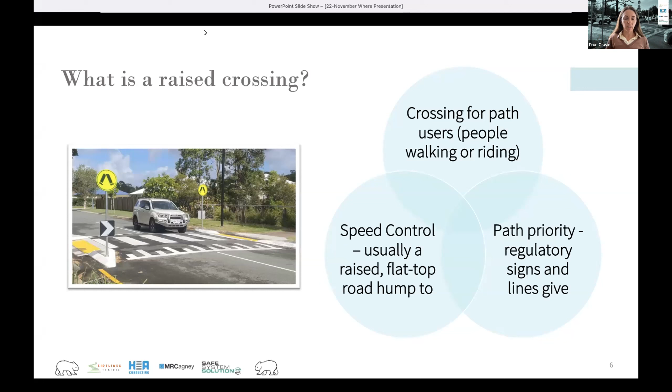There's three key attributes of what makes a raised crossing. The first is that it's a crossing for path users, so it's a crossing point that needs to have paths connecting to it. The second attribute is it needs to have some kind of speed control - that's our safe system that opens up opportunities for people to see each other, reduce vehicle speeds, and provide that safety benefit. And the third is it needs to have path priority, so path users have priority over vehicles.

So it's that kind of ambiguity. In the next section we'll be looking at, you'll be learning a lot about stay safe, obvious, and step free. It kind of fails that obvious test when we have to be questioning who goes first. So that's what isn't a raised crossing.

We'll have a few little action times in this presentation, just to get us going and moving, applying some of that in practice. This is our wombat's thumbs up, thumbs down - we've got this very judgmental wombat who will be judging us. So I want to use the chat quickly, and for each of these examples you're going to let me know whether it's a raised crossing or whether it isn't. This is our first example, in Maroochydore.

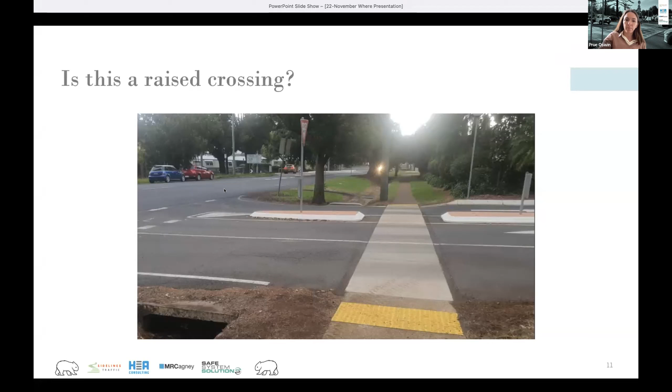What about this one? I think our group is quite unanimous - no. This is a very interesting one actually - this is the driveway access to a school. There's some treatments that would suggest path users have priority, but there's nothing to drivers to suggest that path users have priority. Legally, the path users would have priority in this situation because it's technically a driveway, but there's nothing there to indicate that to drivers. So it's an ambiguous situation, judgmental wombat.

This one - let's see, oh this is more divisive. Yeah, we're giving 40/60, 50/50, yes/no. This one is more divisive, and I guess in terms of that, it's not as obvious as the other ones. So what we could do, I think we need to think about how we could make it more obvious.

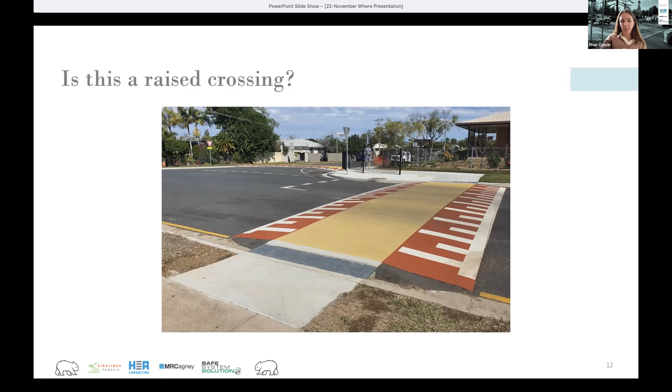This is a shared path priority crossing in Queensland. It's not great from the view we've taken it, but what you can see in the background is there's a give way line and give way signs on the approaches. Right in the background you can see there's a little underplate for the give way signs that has the ped and cycle symbol. Some other things we could potentially do to make it more obvious, because it's a shared path, is put a center dashed line down the middle to show we've got path users coming in 2 directions - mimicking the bikeway standards for crossings, which might help with that obviousness. But that one is one we would call a raised crossing.

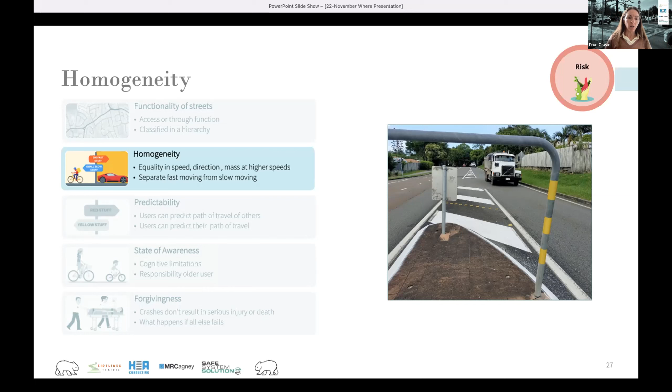This is a contrasting example where at that crossing point, at the place where the vulnerable road users are coming in contact with the big fast stuff, we're slowing the big fast stuff down to create those homogeneous speeds.

It's going to be very difficult for them to predict which of those cars, if any, are going to be turning. So basically the assumption here, since there hasn't been any slowing down, is that all the cars are going fast. Predictability is about being able to predict your own path of travel and the path of travel of other users. And when things become unpredictable, it becomes very difficult to predict when crashes might occur.

The examples we have at roundabouts are a really good example of predictability, because the same issue happens where it can become incredibly difficult for people to predict which vehicles are actually turning off the roundabout. And at that side road we were looking at before, it's difficult to see which vehicles are coming through and which ones are leaving.

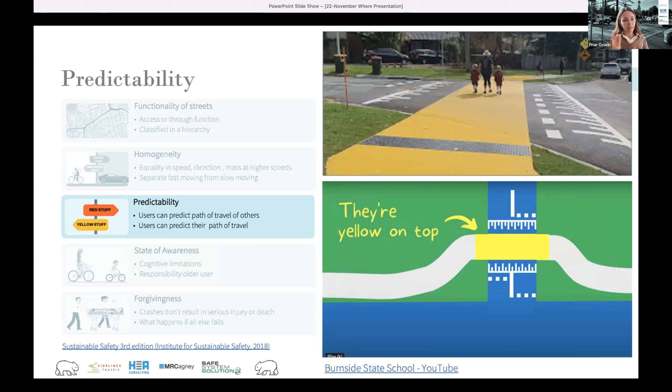One of the things with the yellow crossings too, these are being installed around schools. So the example below, there's some little extracts from a video that was developed as part of the project to roll out and to distribute between the parents and citizens clubs to the students and parents and things. But one of the reasons we made it yellow on top, we wanted to make it predictable. It's similar enough to a path that it looks like a continuous path of travel, but it's also a distinguishable color, so you can still train children. You know, you still need to check for vehicles. That's what it's doing. It's asking them to check, but the drivers have to give way.

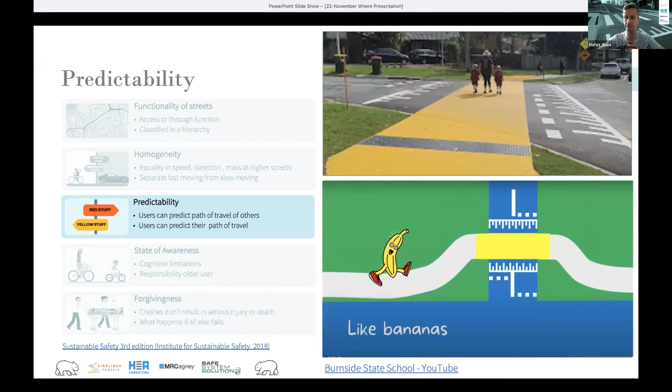So does the color yellow signify anything else, or is it just because of its visibility and prominence? It's used as a warning color. It's signified in the MUTCD. So it's used typically as a warning color. So it doesn't have an actual "you must do this," but it raises an awareness. So it's chosen because it's kind of consistent with the message of warning.

We also need a color that contrasts really well to the ramps to make the pathway look apparent. It also needs to look like the pathway is continuous to make that obviousness. And also a color that's just describable. To me, that's the final piece of the puzzle, so that we can pass the story on if anybody is confused and say, hey, where it's yellow, you need to check.

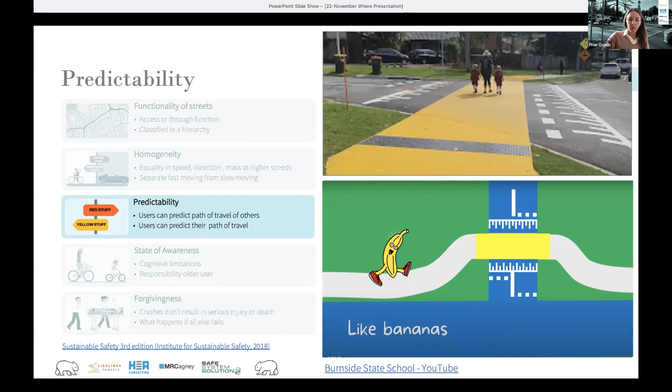So we have got a question here. Simon asks, does yellow signify shared path? No, it doesn't signify shared path. No. Thanks, Brett.

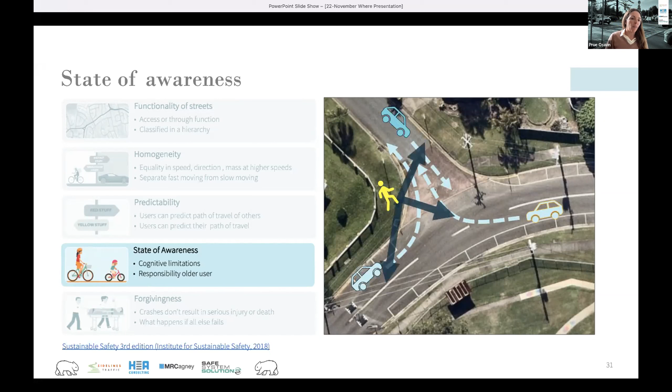I've got an example of this now. This is my son, and so we've practiced this crossing lots of times. We've talked about the 3 different streams of traffic he has to think about. It's pretty tricky for him to see around that parked car, but he's waited till the crossing supervisors come out. Now, oops. The camera work in that video is not great.

And that's because what actually happened is he checked the first stream of traffic, this first blue arrow. He then checked the second stream of traffic. Sorry, I don't know why that's going again. But he forgot the third one, which is an easy one. So it's this third one that we often forget. You know, it's difficult to get. And that's when I've kind of stepped out and made myself obvious. So it's those 3 different directions of traffic.

And I like this quote from Mark McDonald, a technician I work with at TMR. There's a reason we don't let children drive motor cars, and making them make these complex decisions and think about lots of different traffic streams is not the right way to be designing for a state of awareness. So it's really about these cognitive limitations, and also putting responsibility on the older and licensed road user. Those people have demonstrated a certain level of competence. And so this is an example of the treated crossings after they've been installed to address those issues.

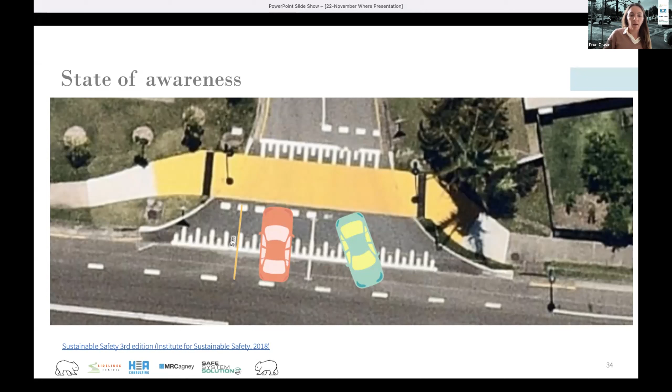Session 3, we'll hear from our world expert in mind wandering during everyday driving. So we'll hear more about that, kind of how raised crossings can be useful in that situation.

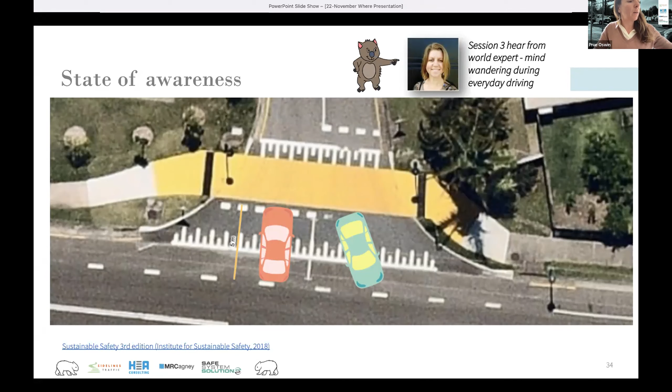Oh my God. Right, so we're still going with state of awareness. This is a pretty big one, and I like to think of this as my most complicated slide. So hang in there with this one. But some really interesting studies have been done on what's called visual looming and how we perceive vehicles coming when they're traveling at higher speeds. So I'm going to talk you through this graph. If you've got any questions, let me know.

But basically, what they did was, sorry, I'll just take a step back. So they took children out to a site, and they timed how long it took them to cross the road. And then they stood next to them, and as a car approached, they asked them, would they be comfortable to cross? And they had to keep saying yes until the car was close enough that they decided no, they wouldn't cross because it was too risky. They didn't have enough space.

And what was really interesting was that as the vehicle speeds got higher, so they went from below 50 kilometers an hour up to over 60 kilometers an hour, the buffer time between how long it actually took them to cross and how much time they allowed shrunk. So below 50 kilometers an hour, the safe time is here. They had about a 3-second buffer, which I think is a pretty good safety buffer. If it's going to take you 5 seconds to cross, having an extra 3 seconds up your sleeve is probably pretty good. But when you got over 60 kilometers an hour, it was down to less than 1 second. So even though the risk had got higher, their buffer had got less.

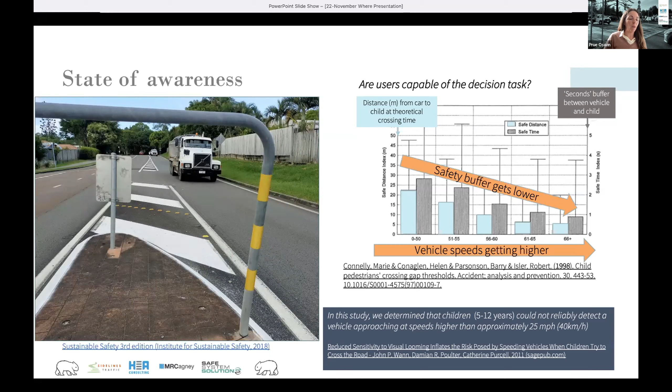So we really need to think of this as part of the state of awareness. It's the cognitive kind of limitations of the users we're providing for and what we need to think about on the path network. We also need to be thinking about someone with a vision impairment or a mobility impairment that's going to take them longer as well. I found that really interesting, that one.

So this is what we call our critical impact speed. So 20 kilometres an hour for death or serious injury, or 30 kilometres an hour to prevent a death. So what we want to make sure is that if a person is hit by a vehicle, it happens below this critical impact speed, and 30 kilometres an hour is generally accepted as our safe system critical impact speed for a pedestrian being hit.

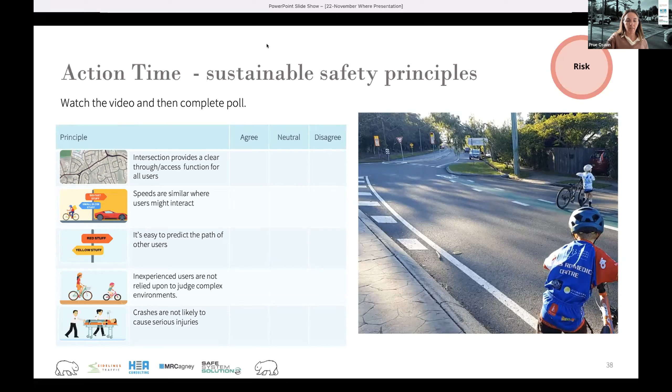And we've got one more example now. So we're going to go into, well, is this poll 2? Nope, we haven't polled that. Hang on. Right. So we've got another example here. Again, it's a roundabout. So we'll do the same thing. Interestingly, this has similar traffic volumes as the other roundabout.

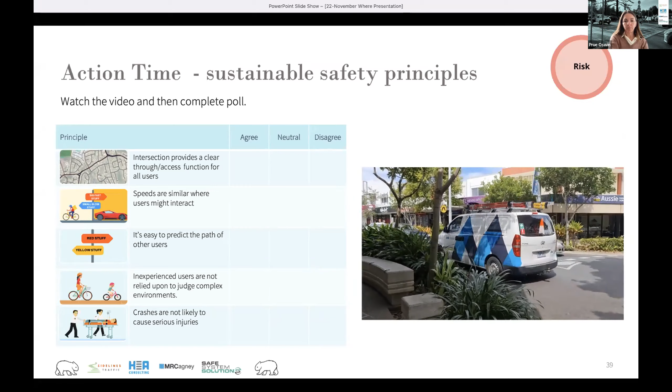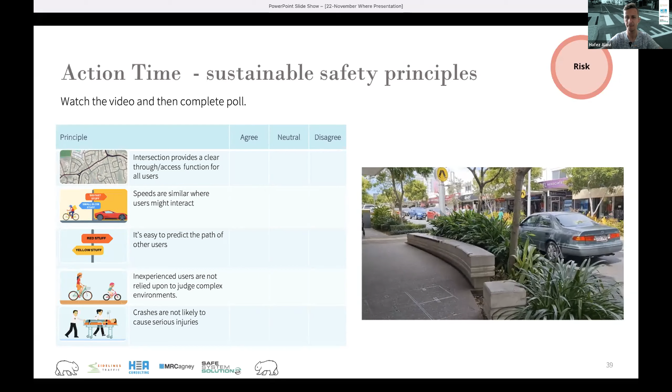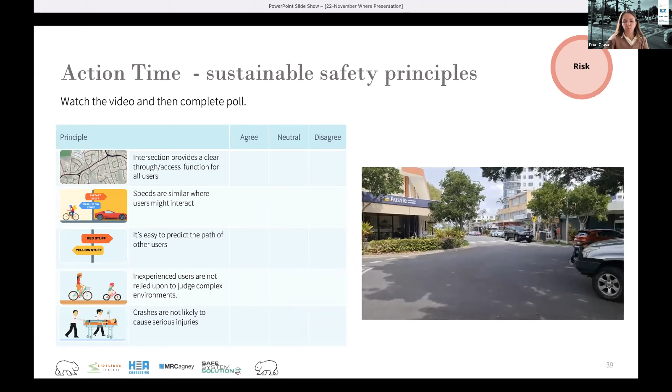I'm also interested how my brain uses comparison to judge the situation. So in a sense, it's sort of a bias. I'm biased by your first video to judge your second video. Yes. Right. Well, we might launch the poll on that one now too. Let's do that. So let's see how we go here. Cool. Oh, we're going much better.

I also have a question for us to ponder here, and that's the difference between perception and actual risk. Perceived and actual, yes. So, Bill has a comment here about visual clutter, like grasses, greenery, road furniture, street furniture, they might block children or younger kids who are not as high. Yes, I think that's the case. Vegetation actually needs to be very low to maintain sight lines, because you need to be able to see most of the kids to see that they're moving, at least half of them.

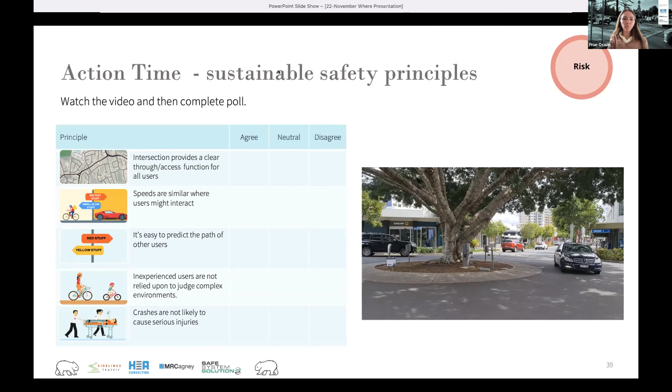Yeah. Okay. It's a good question.

Okay, so the next section. We've talked about risk, and that's quite a complicated, that's our big chunk of theory in this part of the session. And the next part, we're going to talk about connection. We're not going to go into this in a whole lot of detail, but we're going to use the Miro board in a few minutes. So if you can get your link going to that, that would be good.

So when we're talking about connections, it's like where are crossings needed in a safe system? We've gone through risk. Now we're going to talk about connection. I'm just going well here. So looking at our network, looking at where people want to go, desire lines, movement and place, where they need to access public transport. So where is connection needed?

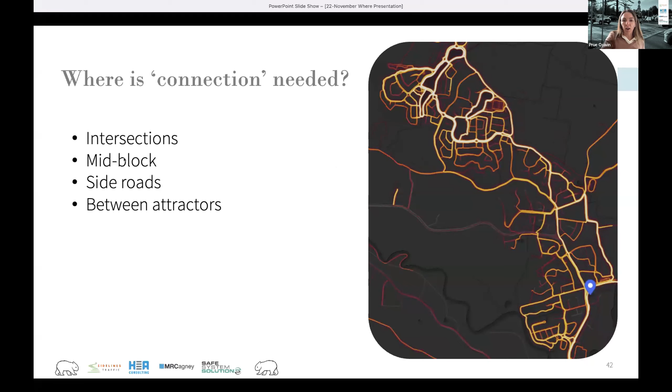We need intersections, we need mid-blocks, we need connections to attractors, between attractors, side roads, all sorts of places. We were looking at our network, and we think about where we might need to treat these situations in terms of where connection is needed, and we need to think about where there's risk.

So we also need to think about the fact that pedestrians really don't want to go out of their way. They're very committed to desire lines. Pedestrian trips are short trips. They don't go very far. So getting people to go a long way out of their way because we've decided we're going to put 3 crossings in this whole vicinity is not really going to serve our purposes.

And I've just got that example because, yes, there is a crossing just down the street and there's another one down the street, but they're not serving the purpose of these children that have a desire line straight across the street there. So we're not going to go into much detail, but where is connection needed?

Well, in lots of places, and drawing attention to providing connectivity between bus stops. These can be the super highways for people who don't have licenses. And if they can't get across the road to access the bus stop, then that limits their access to public transport. So thinking about that, side roads, roundabouts, all of those places have been identified in our own site visits, as well as by community members.

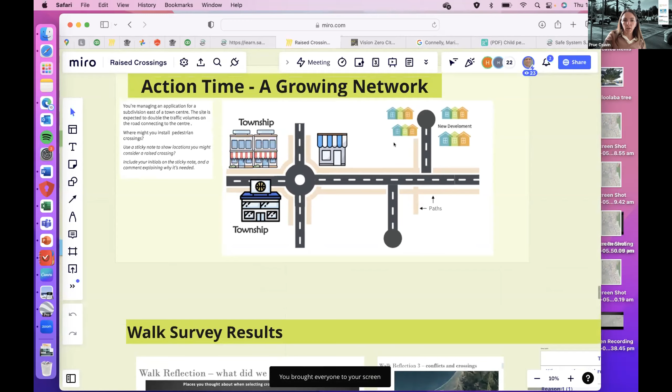So we are going to do a quick activity, and this is in the Miro board now. So if we go to the Miro board. I just shared the link in the chat room here. Fantastic. And we are going to go into this growing network now. Bring everyone to me, in case anybody's lost. Beautiful. We have 22 people here. No, 24 people. Well done.

So this is the task. You're managing an application for a subdivision east of the town centre. So this is our new development out here. The site is expected to double the traffic volumes on the road connecting to the town. So this is the town centre over here on the left.

Where might you install pedestrian crossings? So use a sticky note to show locations where you might consider installing a raised crossing. Include your initials on the sticky note and a comment explaining why you'd think about putting one there.

I like that we've picked up on this roundabout. I've put this example in because we often do a good job of thinking about how new developments and increasing traffic volumes will impact the performance of intersections from a capacity perspective, and that might trigger improvements to active transport. But I don't often see it triggering improvements to crossings. When we get to a certain volume on the road, refuge crossings become too risky - there's not enough gaps in the traffic, and we need additional support for people crossing. So I like that with this busier road, we're thinking we'll have to upgrade our path networks to keep an accessible path network for everyone, and we've thought about those increasing volumes on the roundabouts.

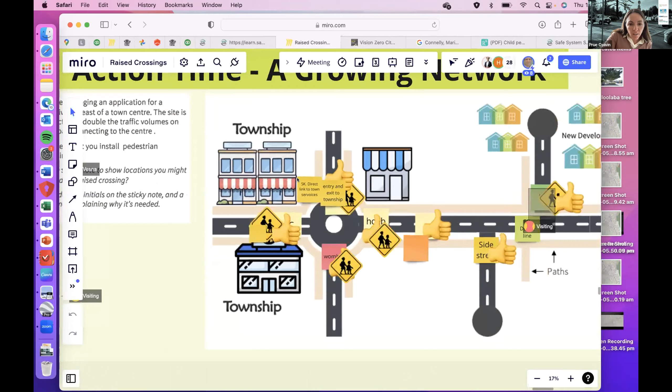What else have we got here? Well, I like - oh gosh, they're getting good with the emojis.

I didn't know we had these ones. What do you think, Fez? Do you teach them that? Oh, I told you, like in the first session, first Miro exercise, people were just sitting there. Second one, bang - that's so good, well done people. It's, again, very fascinating for me to see how our brain works and learns things. Wow.

Well, I hope this stays with me. When I was introducing myself, I just couldn't go past the little walking duck, and I feel like that little walking duck can happily walk down the street into this township now, and they will be well provided for.

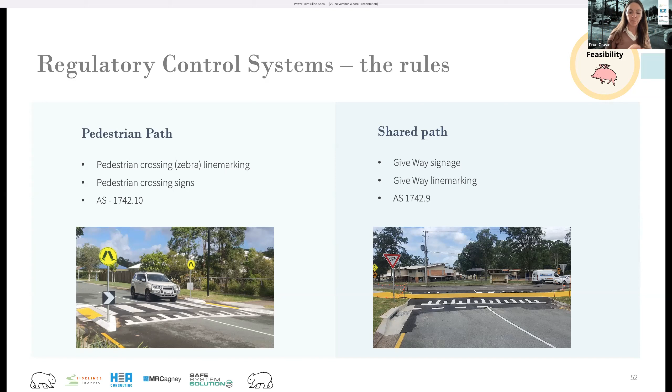And these are the rules. So we're going to talk about some of the rules in the Australian Standard, Australian and New Zealand—I believe these apply in New Zealand as well, I think I'm getting that right. It's usually the Australian New Zealand Standard, but I need to check that, so if anybody has some information there.

So the rules: what we have in these situations is no more than one lane of moving traffic in any one direction—in session 4 we'll talk about some workarounds in that kind of environment. That generally means on anything greater than a 2-lane road we can't install one of these raised crossings. Speed limits on approach need to be no greater than 50 kilometres an hour, so generally that rules out 60 kilometre an hour roads. It specifies not on arterials, and 85th percentile speeds apply on slip lanes—you can put them in at a variety of higher speeds, but you just need that speed at the crossing point to be low, which you can usually achieve with the raised crossing. So these are the rules.

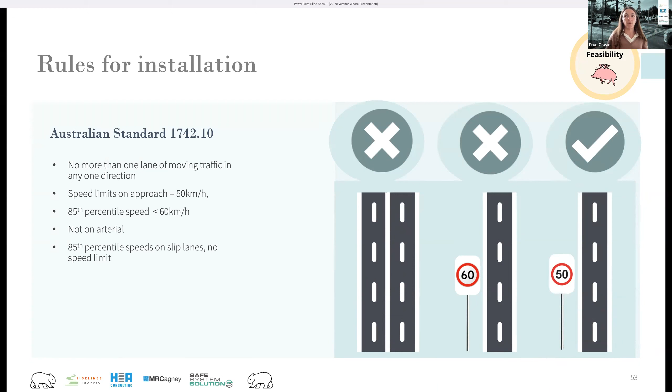So this impacts our feasibility. Just sharing some examples of what some jurisdictions have been doing—each jurisdiction, what most do, is publish supplements to the Australian Standard that apply in their states. So in Queensland, they published Queensland guidance that allows—

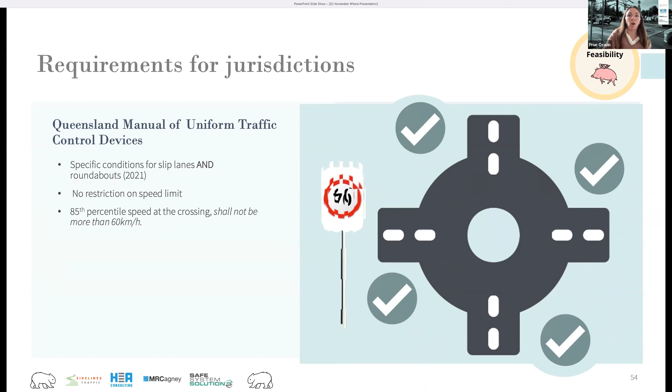—provides specific conditions around installing crossings on slip lanes and on roundabouts. So the guidance around slip lanes now applies to roundabouts as well. There's no restriction on the speed limit in terms of the roundabout, but the 85th percentile speed at the crossing should not exceed 60 kilometres an hour. That means in this situation you can install a raised crossing. These are two very powerful safe system treatments, so it means you can install them. Often what we look at is, if we really need a crossing in an environment which isn't a low enough speed environment, you can introduce a roundabout with crossings, and that can address a variety of risks—even up to 70 kilometres an hour in Queensland.

So in the Queensland supplements to the Austroads Guide to Traffic Management and the supplement to the Australian Standard, they have specifications around how these things can be installed, with examples. Basically, when installing them at a roundabout, it's very similar to a side road, where we're putting it one car length back so the driver thinks about the roundabout, and after that they can think about the path users. There's a maximum of path users coming from 2 directions, so we're not even getting the 3 that we'd get at an average side road crossing with a child. That's how that guidance is applied, and they've got specific guidance in their supplements, the Guide to Traffic Management and the Guide to Road Design as well.

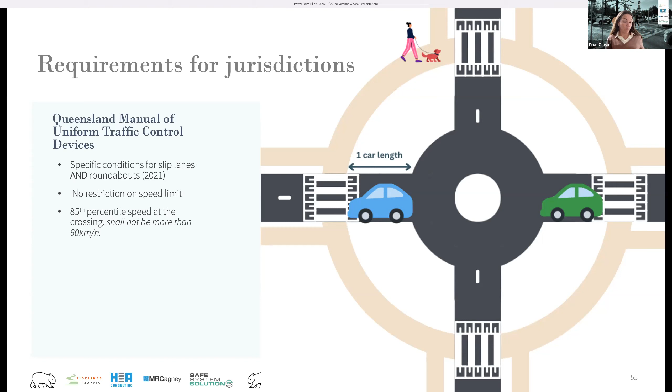Session 4 will go into more detail about the placement of crossings at roundabouts as well.

So how do we apply the rules? Road safety platforms we've talked about before—they're efficient, they're safe, they're value for money, they're transformational safe system treatments. So we don't want to be limited necessarily by the road conditions we've got.

We might want to challenge our existing road conditions to create environments where we can install raised crossings. So modify road environments where you can to install crossings, and install other treatments where necessary. For example, changing a 60 kilometre an hour road to a 50 kilometre an hour road means you can get a raised crossing in, and suddenly we've gone from people crossing in a 60 kilometre an hour environment, where fatal injuries are almost certain if something goes wrong, to something like 30 kilometres an hour because we use the raised platform to bring it down from the 50 it's posted at. So you can go from completely not safe-system aligned to completely safe-system aligned with a small reduction in the speed limit. That's one example.

In multi-lane roads, that's a situation where currently we need to signalise those intersections, so put your budgets there, and look at things like introducing roundabouts to change the road environment. You can have lots of benefits in terms of drivers as well, and road safety benefits along the corridor, because we're creating safe access points and exchange functions. So that's the way we want to encourage approaching this problem, but knowing the rules is an important place to start in terms of where we can install them and feasibility.

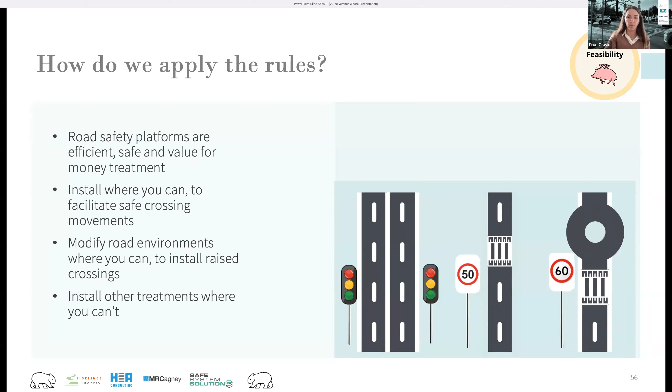Also, the Queensland Department of Transport and Main Roads produced a guideline for raised priority crossings. It addresses some of the other issues about feasibility. Some of the things we've identified in this course and previous courses as barriers for these kinds of treatments are practitioner knowledge and practitioner comfort with these new types of facilities.

In the Queensland Raised Priority Crossing Guideline, it's actually published with some research where they took observational studies of crossings that had been installed, to map the interactions between people riding and between cars. They've published that data and its findings, which helps give you confidence in how these facilities are actually working.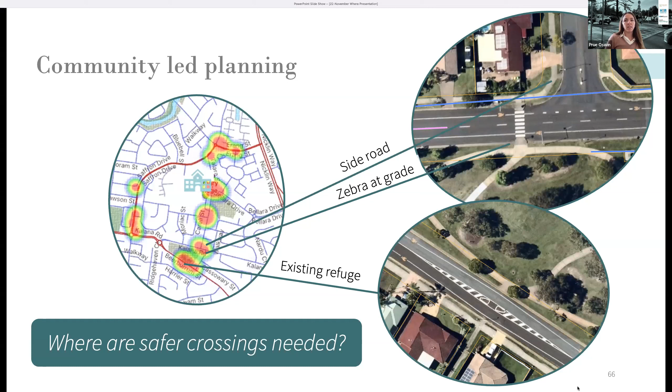The existing refuge popped up as a place that people were really concerned about as well. And again in the surveys that I've conducted, refuges have come up as a place of concern. I'll show you some data about that as well. So if we look at the other places that appeared where a safer crossing is needed, we've got this roundabout here. So that unpredictable environment. Again, we've got refuge crossings here, in the median.

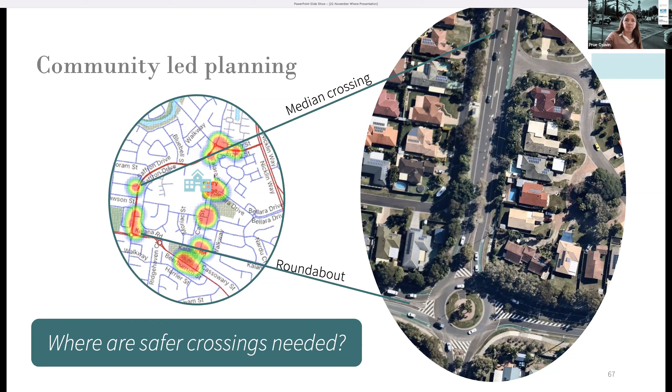Now, this survey was actually undertaken around a school. We had about 90 responses to this survey, and we've got about 10 different sites to treat. Each person was allowed to provide up to 10 spots on the map, just like in your homework task, but we didn't get hundreds of different spots where people were concerned about their safety. We got probably a dozen, and it's really interesting how it does focus in on specific sites and turns itself into a data set, in my experience anyway.

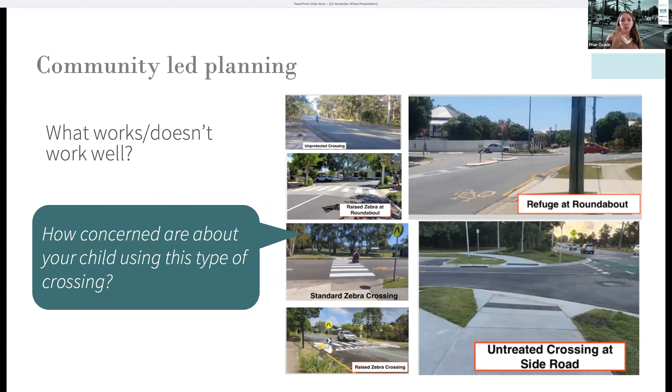So in this as well, we asked really specific questions about how people feel about different types of crossings. So how concerned are you about your child using this type of crossing? We showed them pictures, and that's what we do. We've done it with signalised intersections as well.

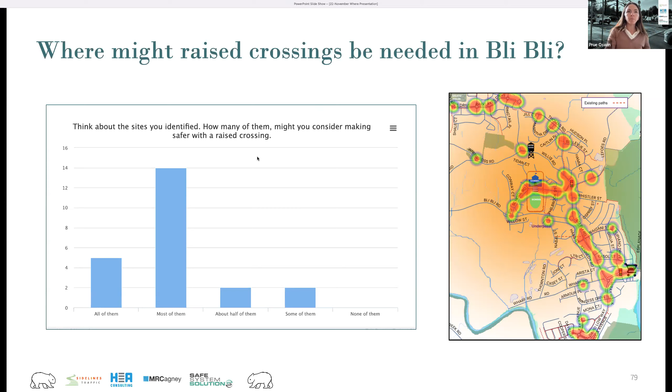And then we had a few people talking about half of them and some of them. So I found that pretty interesting. And it's interesting to gauge from other practitioners, you know, where are we calibrating in terms of where are raised crossings? We don't have definitive guidance about this, so having these kind of conversations is interesting.

What are some of the possible reasons that better crossings haven't been provided at these sites? Feel free to enter some things in the chats as well. All of these sites that we've identified have not been built, or they might have been built and they're not up to standard. Why is that? It's an interesting problem. And as we had in that case study before, we've got more and more development going on to the north. And as development happens to the north, this road gets busier. But for some reason, the pedestrian network hasn't been keeping up.

It's not easy to justify investment in crossings on technical grounds alone. So we need a compelling argument to justify these treatments, especially if there's not crashes. That's often the compelling argument, which is often missing. So this is an attempt to solve that compelling argument and say, hey, our community wants this.

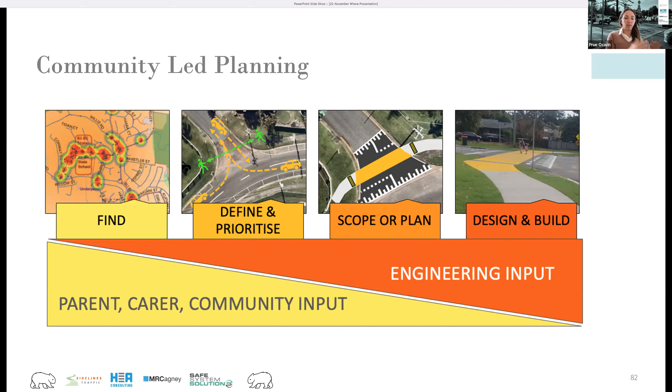I think there's a lot of emotion around being able to move safely around your neighbourhood and being able to convey and pass that information on. So we have had good feedback when we've provided surveys that people feel quite satisfied doing it. We've also surveyed secondary college students, but in that situation, we bribe them with pizza parties. So it's a very different kind of audience there.

Fantastic. Okay, now summary. So where to install raised crossings? I'm just going to do a very quick reflection. We've got a couple of minutes, not long at all. I think I've kind of been consolidating as we go. So, we talked about what and why and what the three key criteria of a crossing are. Where we are now, we went on our walks and looked at our existing ideas about raised crossings. Greenfield sites, talking about the need for connection, but also those principles to understand where we've got risk in our networks and where we might need to be able to treat them.

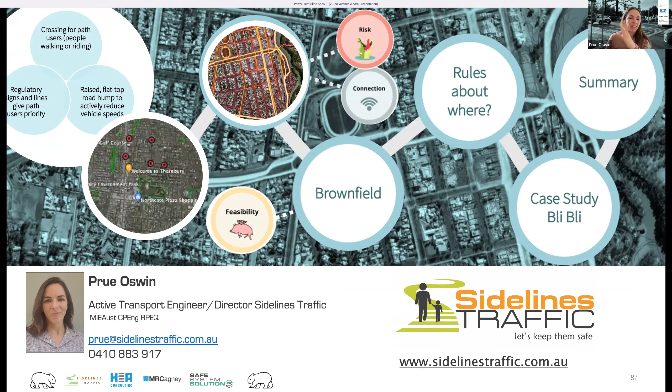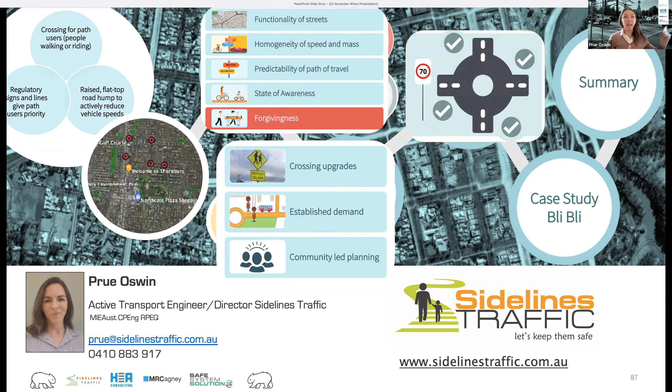If we master those principles, then we can start spotting the risky spots pretty easily. We went through our 5 sustainable safety principles with very long names, and then we had the 3 methodologies in terms of crossing upgrades, established demand, and community-led planning. Rules about where, the importance of knowing the rules, but remembering our vision and what we're trying to achieve, applying them to that purpose. Our Bli Bli case study, and then our practitioner case study, where we were looking at kind of similar data there. So I think we have 2 minutes left, but other than that, I think we are almost done.

Yeah, and I would like to thank you very much for teaching us a few really critical things, talking about those principles of sustainable safety, giving us really practical advice how to locate crossings, also giving us really good exploration of risk, connectivity, and feasibility in brownfield and greenfield, and also stimulating our brains with exercises and comparing them with your practice.